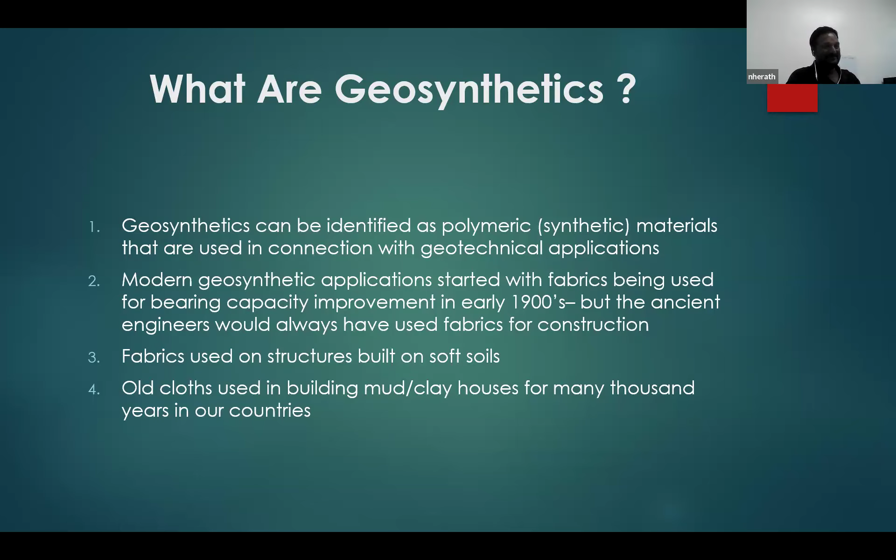Application of geosynthetics: we use it for retaining walls, very high retaining walls, without using metal and rock structures, or in conjunction with metal and rock structures. The ability to use lightweight but strong plastic reinforcing materials like geogrids and nets have been helping retaining walls and retaining structures for a long time.

Roadways - if you ever think about when you're traveling on a swampy area, predominantly soft soils, and wondering how this whole road you're traveling on is holding up without going down or deflecting - most of those cases, geosynthetics are involved in different modes.

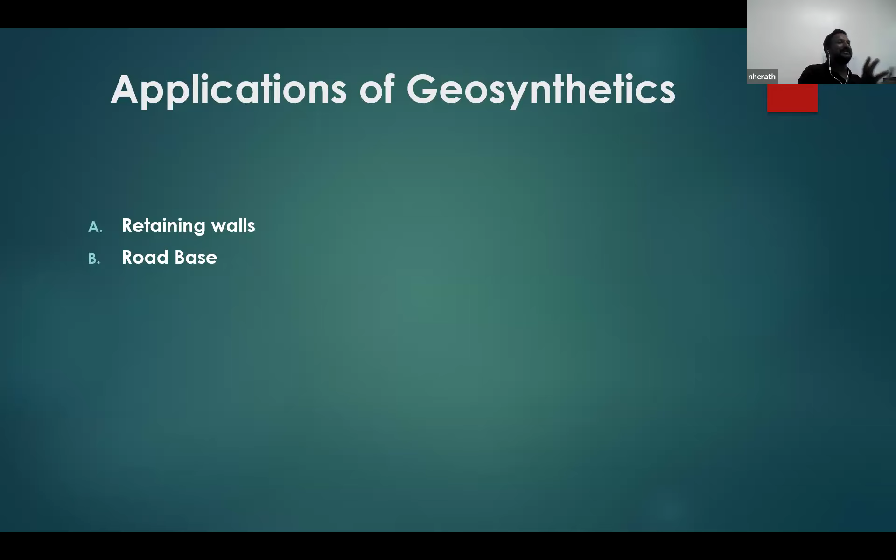Erosion control, which can involve drainage controls using different types of drainage nets and drainage applications. Predominantly, structures people used to use were perforated pipes wrapped with textiles or wrapped with a rock blanket, which is being replaced in most applications by very simple, ready-made geosynthetic strip drains and structures.

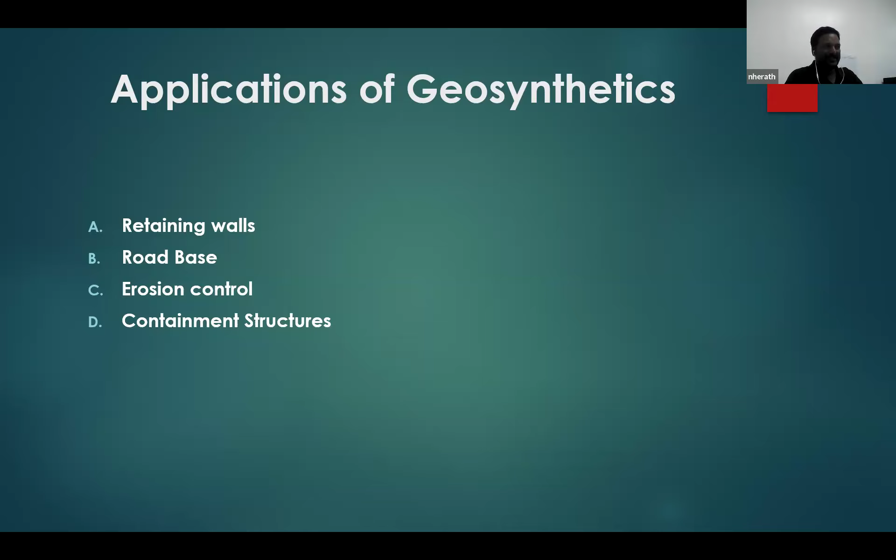This isn't today's topic, but I thought it's a good thing to share a few things about the other uses of geosynthetics. Containment structures - this is our topic today. Containment structures: landfills, tailings dams, chemical ponds, effluent ponds, leachate ponds, whatever it can even be - containment of drinking water, and drainage applications.

Leak detection applications - this is a new area where geosynthetics are coming up. I have added a couple of slides at the end to describe some high-end leak detection techniques, some being used as part of quality assurance, with conductive polymers and conductive geosynthetics increasingly used in structures. So when a leak happens, you will know where it occurs without going into investigation with electronic systems. But I think leak detection is a separate subject by itself, a topic for another day.

PFAS - poly and perfluoroalkyl substances - is increasingly becoming a hot topic. That's been found in a lot of firefighting chemicals and non-stick coatings. Now people understand that PFAS can create long-term and short-term health impacts. So modern day geosynthetics have a big emphasis on this. There's a lot of research and development, especially in Melbourne, on developing new geosynthetics that can trap, filter, and manage PFAS. As engineers you must be aware of the increasing awareness about PFAS. It has always been there, but only now we've started talking about it, understanding what it can do, how to test it, and how to contain it.

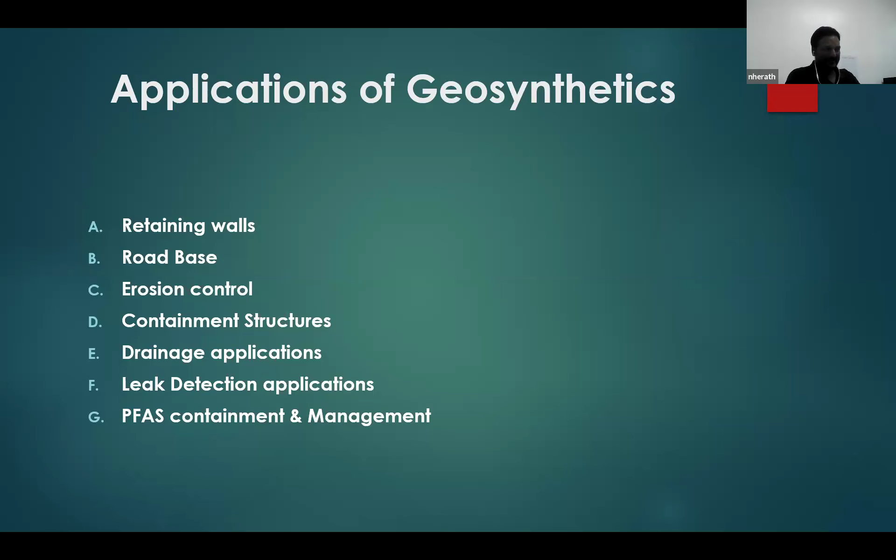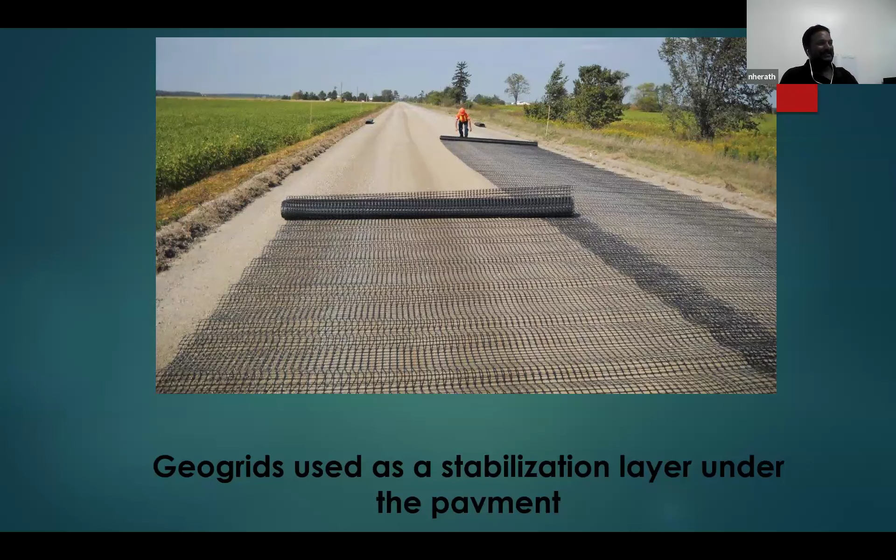A typical example: geotextile used under the pavement as a separation layer. On the left-hand side you can see a road constructed without the separation geosynthetic layer - this is ideally a heavy grade geotextile. You can see the lower subgrade clay material and the rocky material from the top invading and getting into the soft material, causing deflection upon traveling. On the right-hand side, the geotextile stops this from happening.

In this case, the geotextile is acting as a separation layer, stopping the aggregate on the top layer from pushing into the lower clay material, thereby maintaining the shape of the formation. In the long run, what you get is a proper road that will last years and years without needing repair.

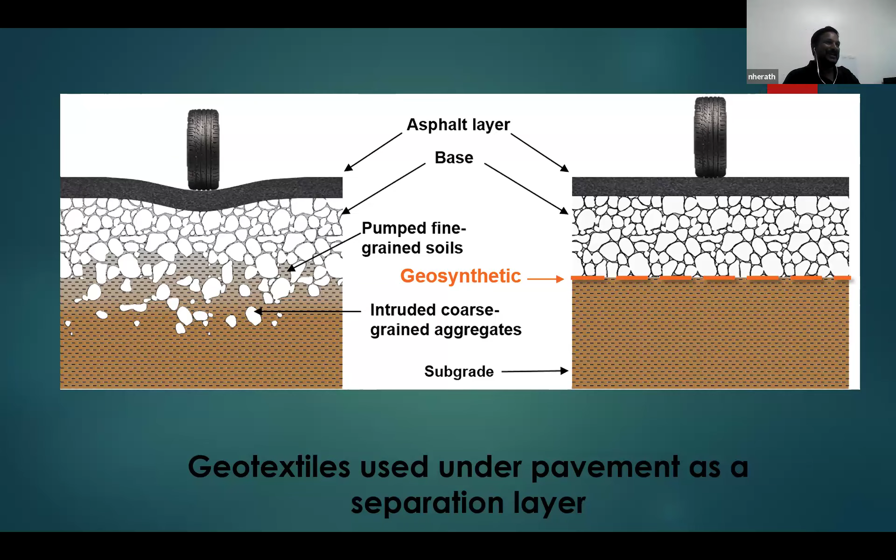Landfill and containment structures - this is the main topic we are going to talk about today. Landfill and containment structures, and the main task of a landfill.

Just to be clear, the landfills I'm talking about are the rubbish tips where we put the municipal waste. It can be clinical waste, chemical waste, or some other waste. It's a purpose-built facility where you can store the waste in a way that the effluent generated is not going into the groundwater.

When it comes to landfills, the main threat is not the waste itself. In the good old days, you'd dig a hole and put waste into it, and that was no problem. The problem starts when it starts raining. Rain creates leachate by washing off all the decomposed or chemically contaminated material, creating that liquor we call leachate. If that leachate goes into the ground, it creates contamination in the groundwater.

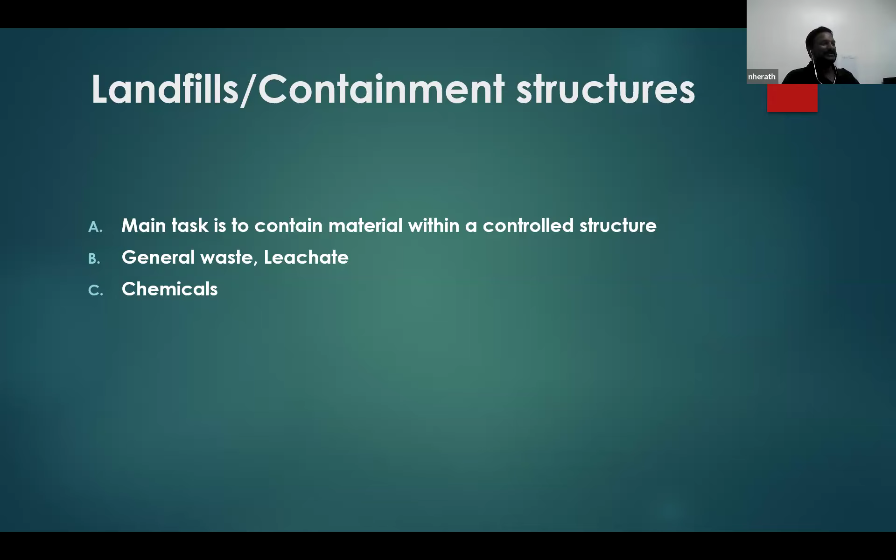And things like that, where you get all these nasty chemicals. Then you have specific chemical storages - here in a lot of places in Australia, you have specific purpose-built big storage tanks where they store things like sodium hydroxide, caustic soda, heavily corrosive material that you don't want anywhere near your groundwater. So there are specific geosynthetic applications, geosynthetic layers and materials being used in these containment systems.

Clinical and contaminated waste, drinking water, irrigation water - especially, I'm familiar with a lot of areas in Australia where you get rain only a few times a year, or maybe once a year, and then nothing after that. So a lot of people build big irrigation dams and try to protect all the water that they can. So drinking water or water storage facilities are also being lined with geosynthetics.

Mining waste - we do a lot of work with mines. A typical mine, one example, is a gold mine: you go down, you excavate, you bring the rock. Gold is predominantly trapped between the quartz veins, so you crush the rock and then leach it with sodium cyanide to take the gold out. But as a result, you get sodium cyanide and cyanides going into the water.

So if you are running a gold mine, you are not allowed to put your mine waste anywhere - you have to build specific huge, almost landfill-like facilities to put your process waste, solid and liquid. Also, when you go deep digging and mining, one problem is that you have water underneath, so dewatering mines is a big subject in mining. You always have to pull your water out, but what comes with the deep lying groundwater is chemicals like arsenic and cyanides and other things.

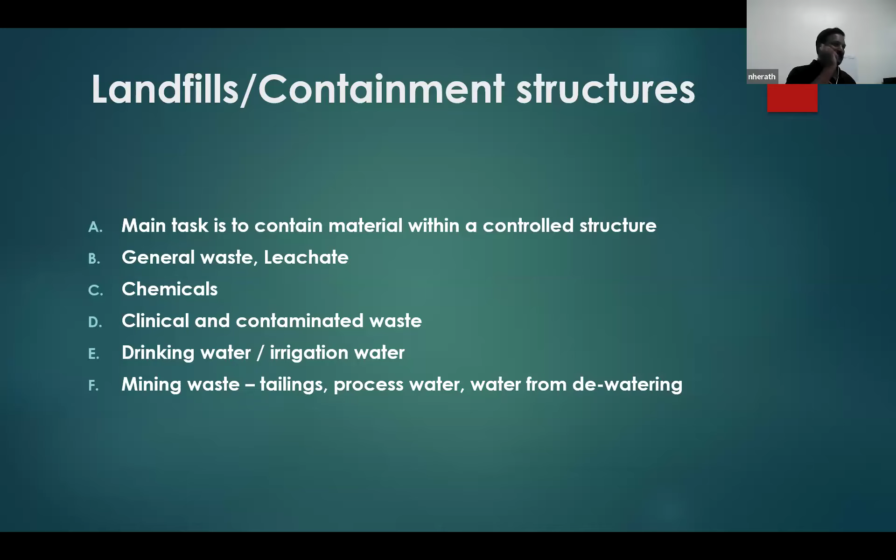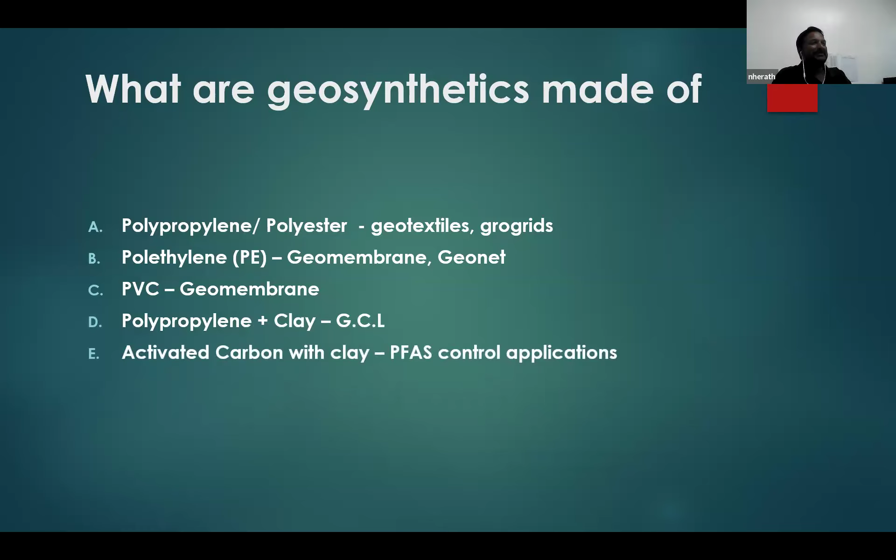GCL, made with polypropylene or polyester geotextiles with a mixture of clay - geosynthetic clay liner. Then you have activated carbon with clay, increasingly being used. All these we can talk longer about, but I think this is not the time - activated carbon is being used in GCLs for PFAS related control applications. Then you have clay with polymeric additives to enhance swelling ability of the GCLs.

Structure of a typical landfill - typical structure of the engineered landfill. You can see landfill has the baseliner, waste being placed, you have a leachate sump. The sump collects the leachate, and you have pipes connected to that to collect it, and you have waste placed. Another significant thing about the landfill, especially the municipal waste landfill, is that you have decomposable materials - upon decomposition it generates landfill gas, mainly methane.

This methane is a problem - it has explosive qualities. So there's a big emphasis at the end of the life cycle of the landfill to cap it. Capping is a different process where you make sure no water is going into that one, generating leachate. At the same time, you have applications to trap the gas and take it out. If your landfill is big enough, there are a lot of landfills in Australia where they use that gas to generate electricity. I know there's one city council, probably many times smaller than Colombo, whose landfill gas after about 4 landfill cells is generating enough power to run their council and municipality buildings. So that's something that's going to waste being used with the proper applications.

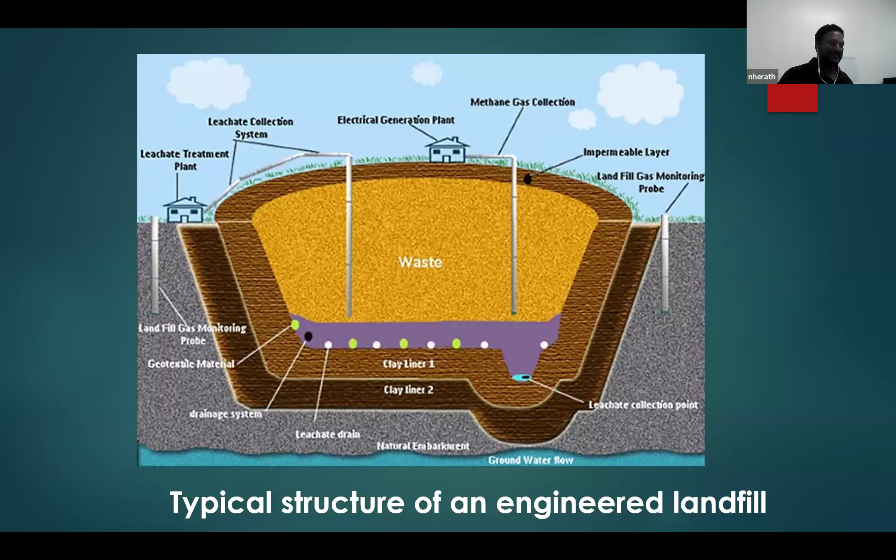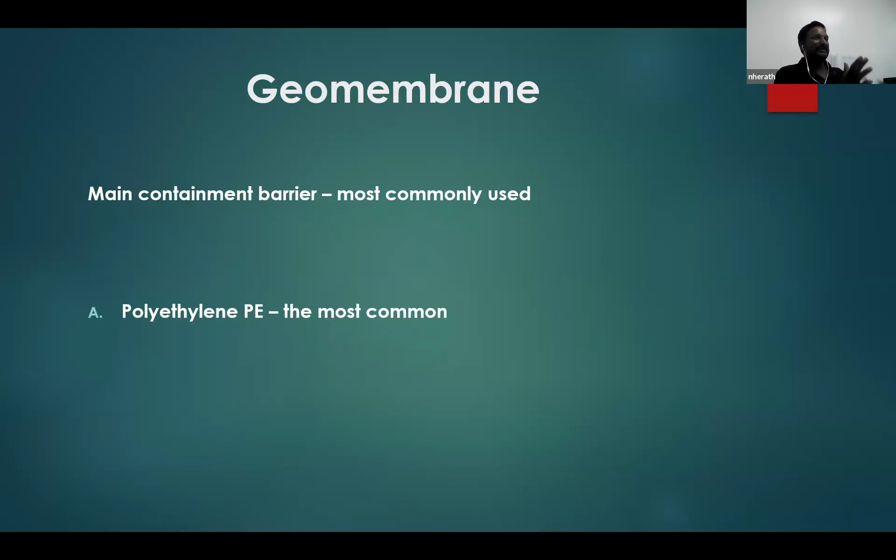Geomembrane - polyethylene is the most common material. Main containment barrier, most commonly used, is the geomembrane. Impermeable and has a long service life based on the make and the additives. So that's another topic again.

When you are using corrosive or highly oxidative materials, the polyethylene resin - obviously the raw material comes from the petroleum industry, most of the time coming from the Middle East - is mixed with a lot of material like carbon for strength, and then a lot of antioxidative materials are used so it will withstand the corrosive or oxidative nature of the material you are going to store in the landfill. Additives is a different subject, but depending on how the geomembrane is made, it can have a medium to very long service life.

PVC is another material. Bituminous geomembrane is an increasingly popular application in containment structures, but not so much in landfills - this is mainly for mining waste tailings dams. Bituminous geomembrane is a heavy grade geotextile, like if you're dipping it in tar - you're putting it in a solution of bitumen, so it becomes an enhanced, thicker material. It's increasingly becoming popular especially in hot parts where the polyethylene geomembranes get wrinkled when you're placing it.

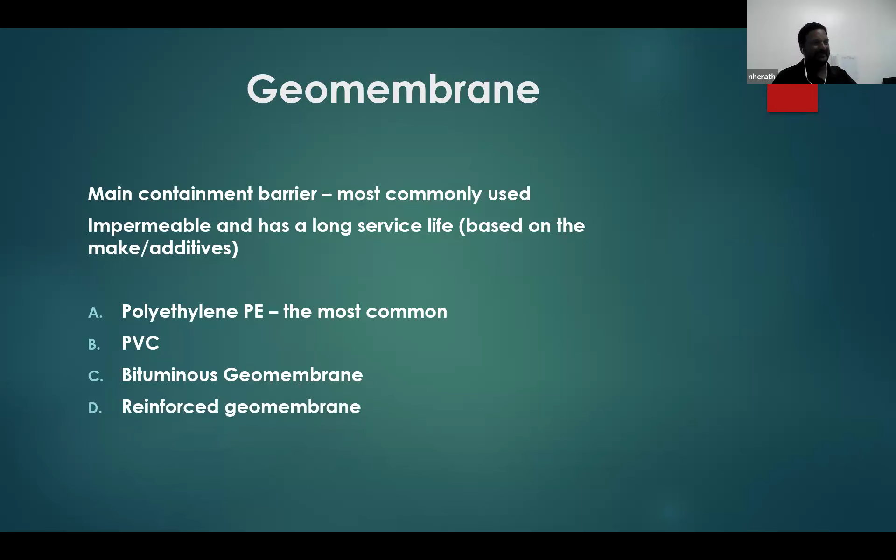Then you have reinforced geomembranes with the polyester grid inside. Typically, geomembranes come like this - these are rolls, about 7 to 8 meters wide, can be about 150 meters long. This is how you deploy them for someone who hasn't seen them - the machine holds the geomembrane, and these people use metal clamps onto it, pushing it down and placing one after another.

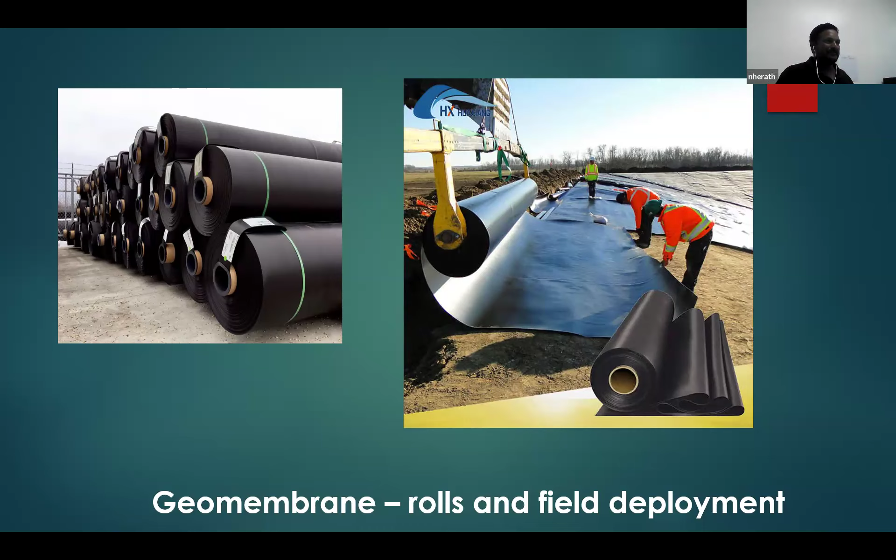You overlap it with about 150 millimeters, and then you weld it with a heat welder, like a laminating machine. This is called a dual wedge welder, and these welding techniques are becoming very sophisticated.

This particular welding machine has the hot wheels pushing the top and bottom layers together. At the same time, it applies heat and pressure. So this is called fusion welding.

That pressure and heat makes the two polymer sheets, two geomembrane sheets, melt and fuse together. So it's called fusion welding. And once it's done, it becomes stronger than the parent material.

So this is called a dual wedge welder, and these welders can be programmed with the speed and temperature and everything. On a very hot day, you run it at low temperature and fast speed, and on a very cold day, you run it slow but at high temperature.

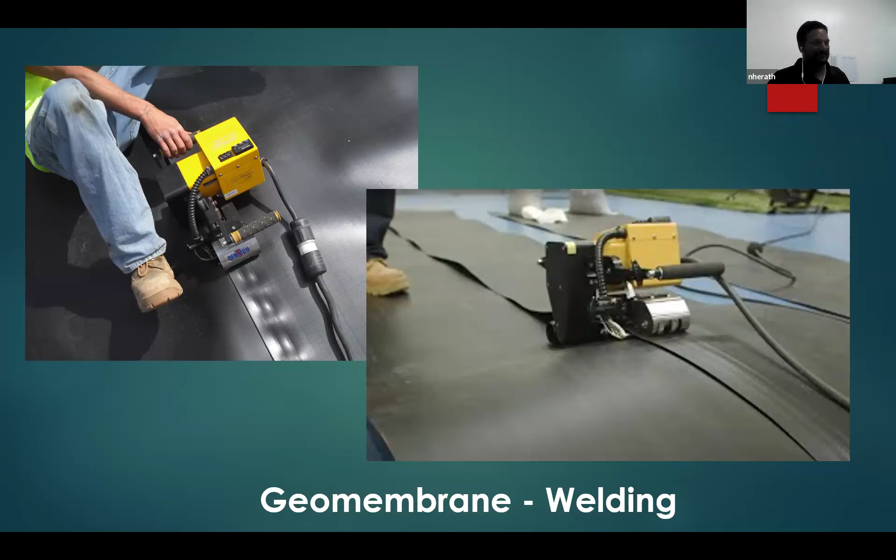Geosynthetic clay liners, GCLs: high quality bentonite clay sandwiched between two geotextile layers makes a GCL, which is a geosynthetic clay liner. This is something that's developed after geomembranes. So what you do is you have bentonite.

If you are familiar with bentonite, it's a naturally occurring clay with very high swelling ability, with a liquid limit that can go about 200 to 300%. Imagine the normal liquid limit of a normal clay, where it turns into mud, is maybe 20% or 30%. If you have high fine clay, a lot of slimes, sometimes it can have a bit higher liquid limit, whereas bentonite can have maybe 10 times that, like 300%.

So 3 times its own weight of water can be absorbed and swell. The main way it works is once liquid or water gets into it, it swells and creates an impermeable barrier. It's easy to install, and it's more impermeable than a clay liner.

Most commonly used is sodium bentonite for its high swelling capacity. If you use a very fine clay and compact it, you normally get a permeability around 1 times 10 to the minus 9 meters per second. You normally install about a 1 meter thick clay liner in a landfill, whereas you can get the same impact using a 1 centimeter thick geosynthetic clay liner rolled material.

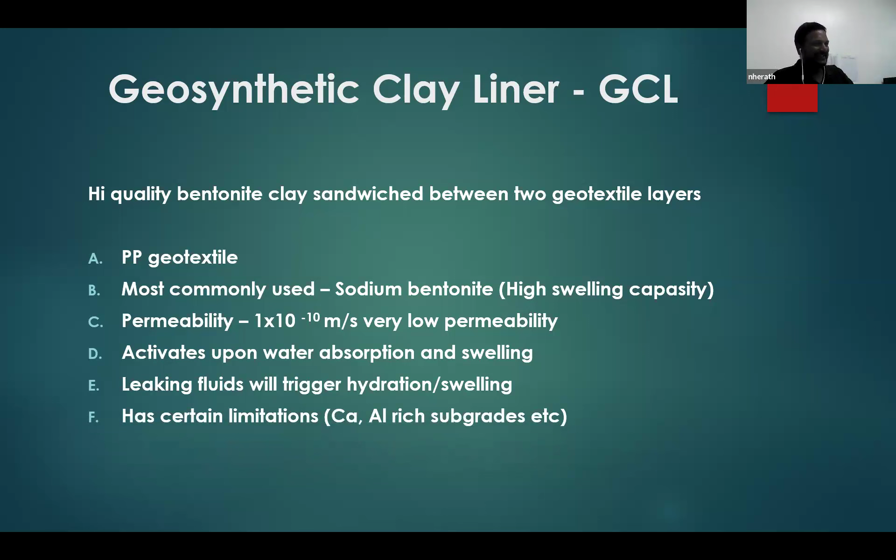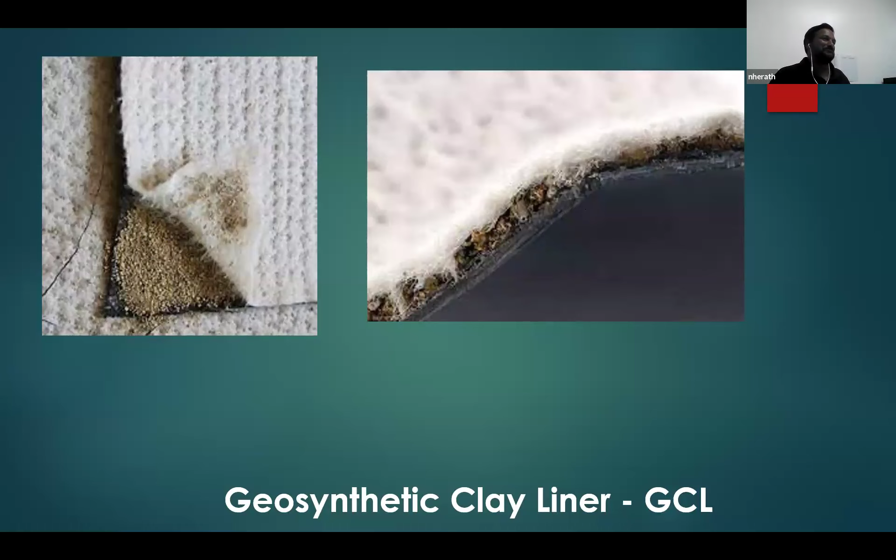This is in the dry form, only about 1 centimeter thick. You can install it very easily, but it gives the impact of a 0.5 meter thick clay liner upon installation. It's costly, but I think the convenience of installation makes up for that.

So here's an example of how much it can swell. A small amount can swell up to a big volume.

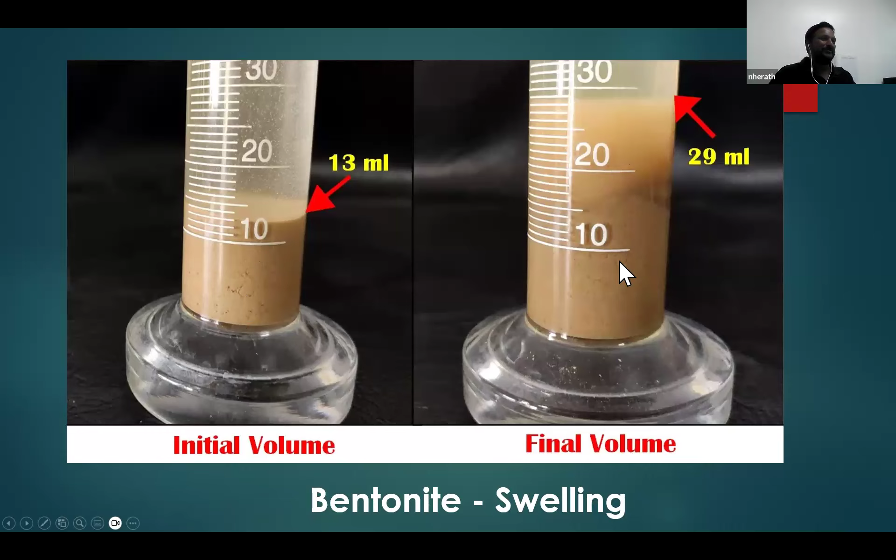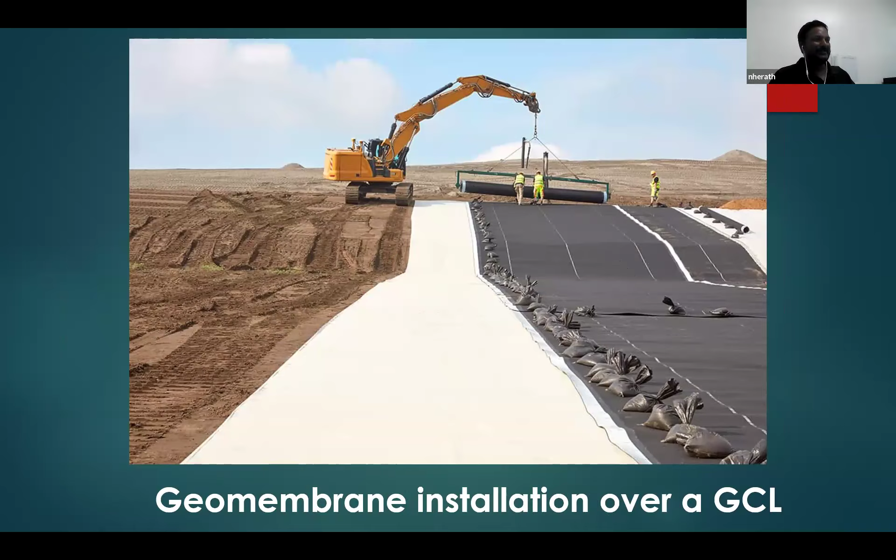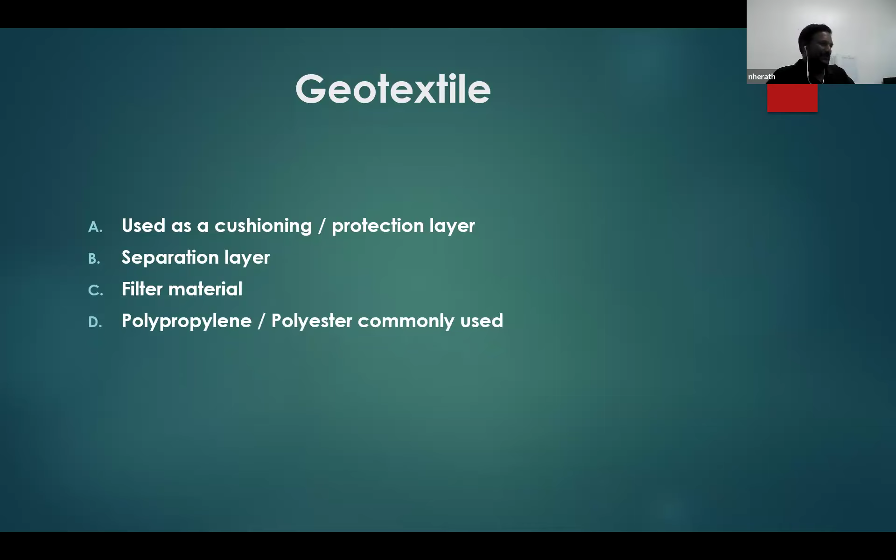Geotextiles are used as a cushioning or protection layer in containment structures, or for separation or drainage structures in roads. They act as a filter material made predominantly out of polypropylene or polyester, the most commonly used, though other materials exist too. Thicker materials are for puncture strength over the geomembrane; heavy grade ones are something like 500, 600, 700 grams per square meter for cushioning, whereas thinner grade textiles are for filtration applications.

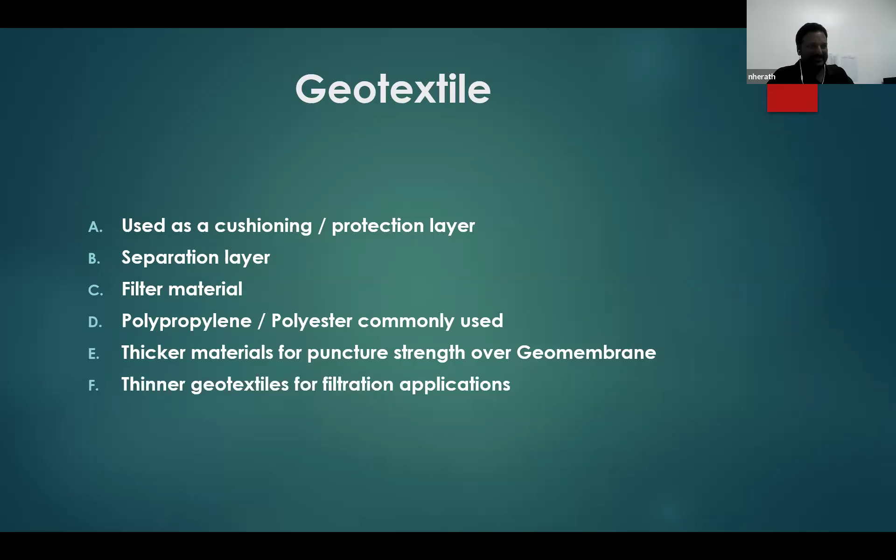Quality management. You've got to have quality. These materials are expensive, specifically made for the purpose, but you need a good quality management system so you can make sure you're buying the right thing, the people installing it are adequately qualified and do the right thing, and nothing happens in between like physical damages.

Darshini, can I have another 5 to 6 minutes? Yeah, sure, Nilantha, no problem. Okay, I realized that, okay.

So for quality management, each project has a technical specification guideline that tells you how to install every layer, how to install the materials, and the standards you have to follow. Material selection criteria are indicated - how do you select the right geotextile, right geomembrane, the right GCL for the intended purpose that meets the design intent.

Internationally recognized standards and guidelines are in use, so it's easy to say your geomembrane has to satisfy this standard. These standards exist everywhere, so you can use them easily - it's universally accepted. All you need is people who know the guidelines, a construction quality assurance system, and a plan.

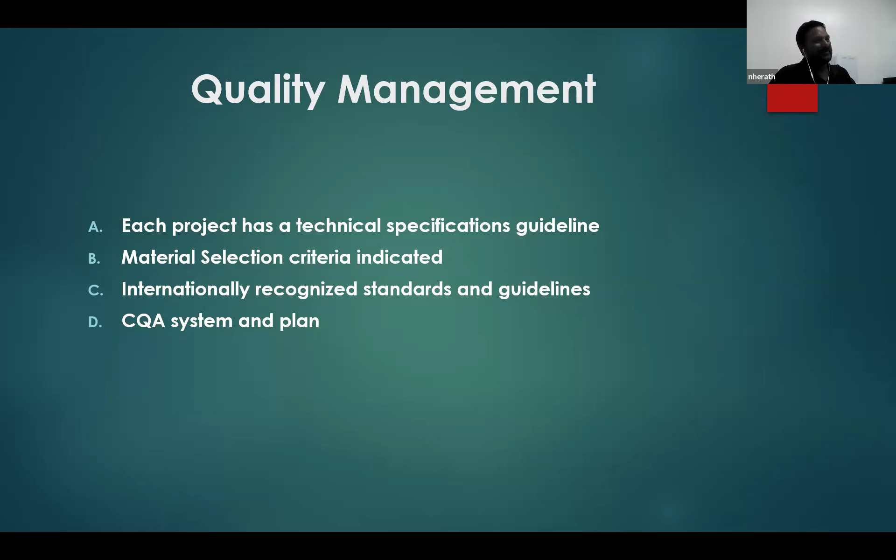Every structure, every containment structure - no matter how good your materials are, how experienced your people, or how good the design is, an independent quality assurance system with people looking at all the aspects is paramount. They do a good service that combines all the little things together to give the right results at the end.

When it comes to quality assurance, the Geosynthetic Institute - GSI, GRI - you can browse them on Google. They've been making manufacturing methods, testing methods, installation methods over a very long time. GRI makes guidelines - two examples: GRI GM13 is about the ideal quality of geomembranes. These are available free - I put a link that gives all the GRI documents, telling you what to normally expect from a geomembrane, a GCL, a geotextile, and different types of materials.

Then you use internationally recognized test methods - ASTM, like SLS we use, predominantly we use ASTM here, American standards, British standards, EN, ISO - and they're all interlinked. Depending on where your material originated, you're tested and QA'd under that standard, but it's easy to match. If you do a test in Australia, you can match it to the same material under a parallel standard and interpret it in local terms.

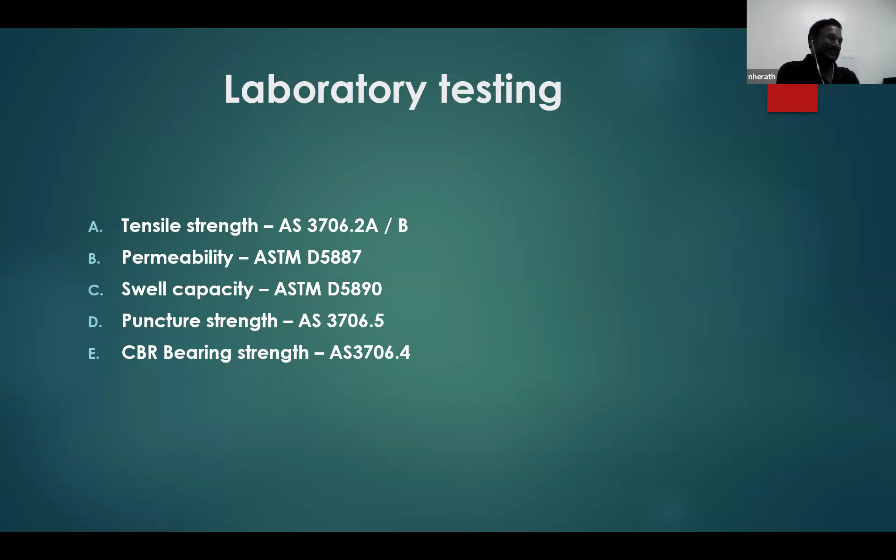You check that method and can test any material from anywhere, then interpret it in local terms. CBR, or bearing capacity - California Bearing Ratio - is used for assessing the bearing capacity of soils, and the same principle is adopted to measure the bearing strength of a geotextile, under standard 3706.4. These are just a few examples, but these keywords will help you find a lot more information.

Liner integrity assessments - this isn't new, it's been happening for a long time, but it's becoming mandatory now. If you install plastic membranes made with top quality material, installed by top quality installers, anyhow when 20 or 30 people are working on site, people walk on the membranes. Sometimes, a common thing here, a kangaroo jumps onto the membrane, and its sharp claws can damage it.

So when that happens, before any containment structures begin, this is the last part of the quality assurance system. Before you hand it over to the user, you've got to do leak detection. These leak detections are mainly electrical, but you also have water-based methods.

The water balance method involves filling the structure with water, observing it for some time, and seeing how much water you lose and trying to find how it's being lost. Colored dyes may also be used, injecting from one point and seeing whether it comes out on another side.

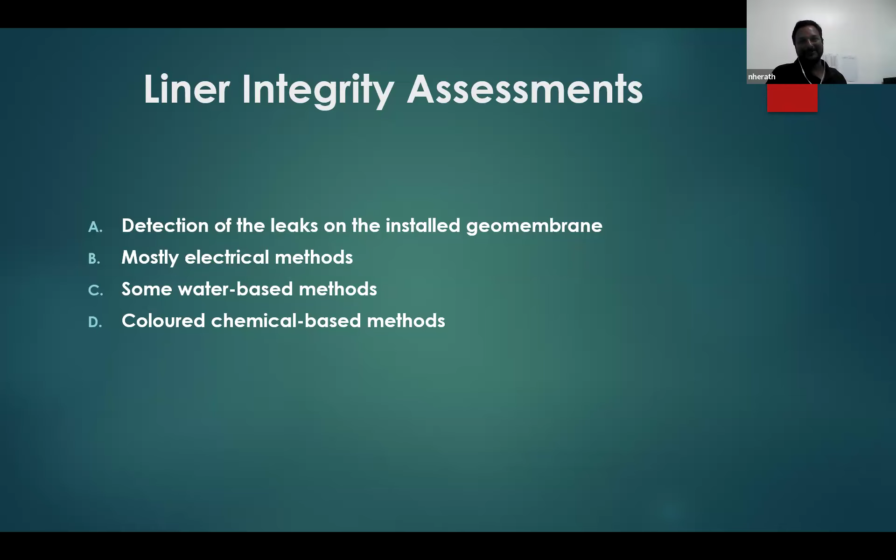But these are time-consuming methods. I'll try to put a few examples. This is the dipole survey method, a geoelectrical survey method where a person carries equipment, walking on a rock-filled area. Underneath the rock fill is the geomembrane, the plastic membrane of the landfill.

So this is the rock filter that collects the leachate. You've got to have the filter, but when installing the rock blanket with dozers and big machines, it tends to tamper the geomembrane, so you can't see where the holes are.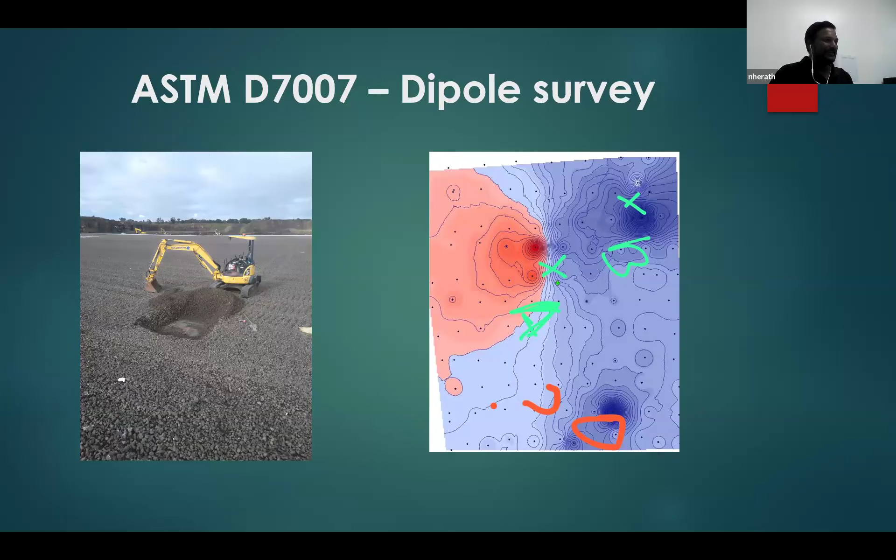On the left-hand side, you can see it's been found, and he's digging the hole to find it. You can pinpoint 1 or 2 millimeter size small holes if you have the right conductivity. This is another method.

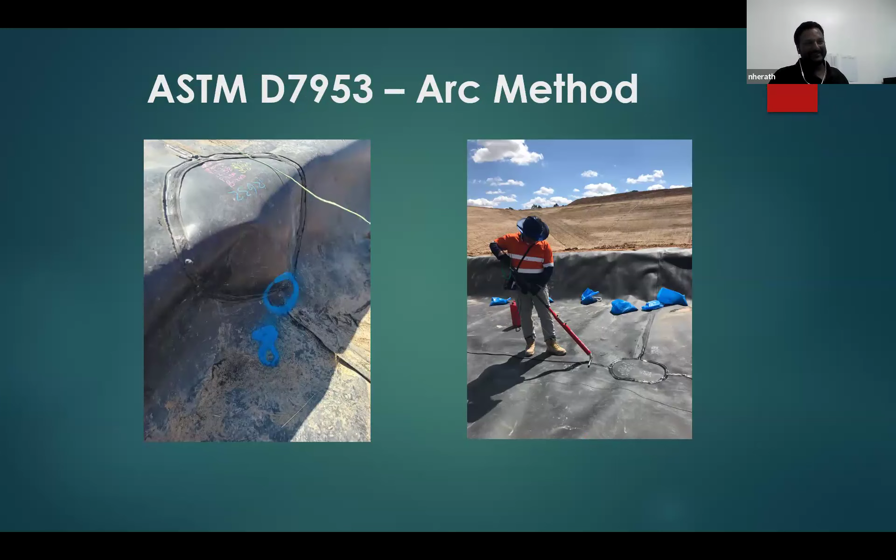It's called the ARC method. If you browse these methods, plenty of information is available online. It's an electrical spark method using about 20 or 30,000 volts to find tiny defects, tiny pinholes in the membrane.

So the CQA person, the technical CQA technician or engineer, should be a suitably qualified, trained person who comes and assesses the construction process.

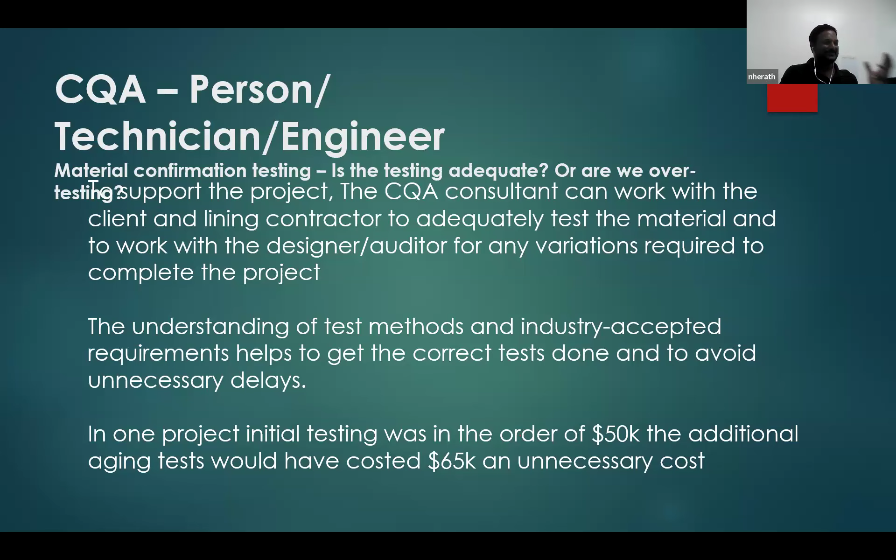How can a CQA person, or construction quality assurance, make it easy for everyone? It means the construction quality assurance person, by knowing the techniques, the specifications, and the design intent, can help every party conducting the work to work together.

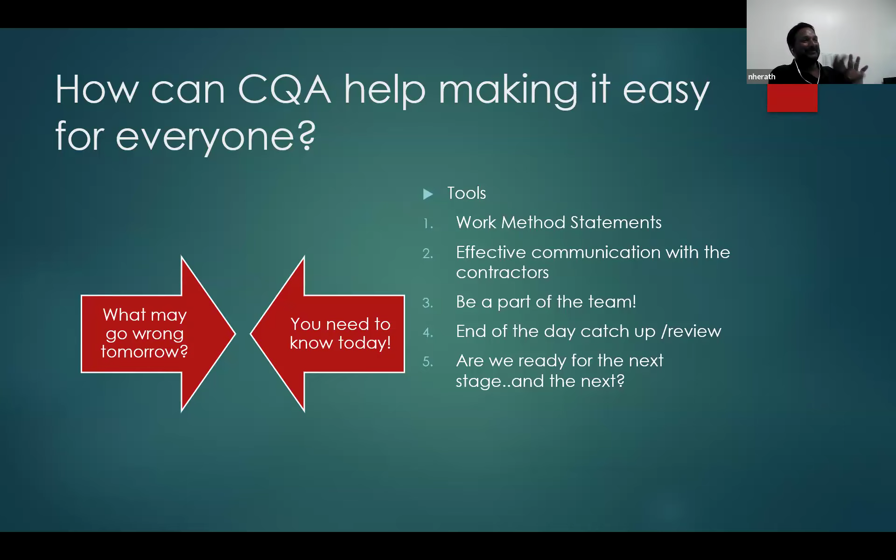We call it the name of the game of construction quality assurance: you've got to anticipate what can go wrong today, so tomorrow you won't have a lot of unhappy people. You can intervene. A proper QA engineer, QA company, or QA consultant should be able to guide the others on how to work on the next section of the structure.

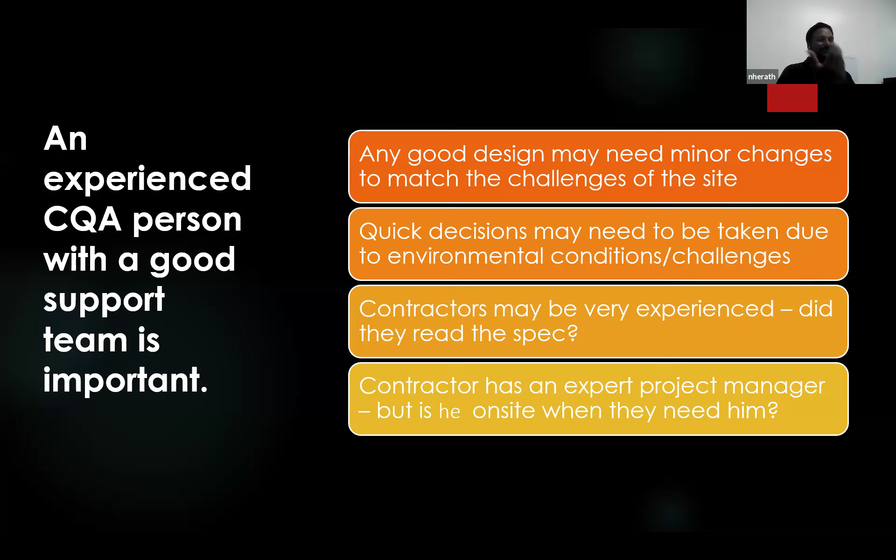A slide about experience—why you need an experienced CQA person. In Melbourne, it has to be independent from the designer, the principal, or the construction company, but it happens in different ways.

Effective, good communication with the interested parties—independent CQA is important. Adequately experienced people can make the project's quality much better. Experience in the field is important. Construction quality assurance can help everybody achieve the goals, and finally meet the design intent.

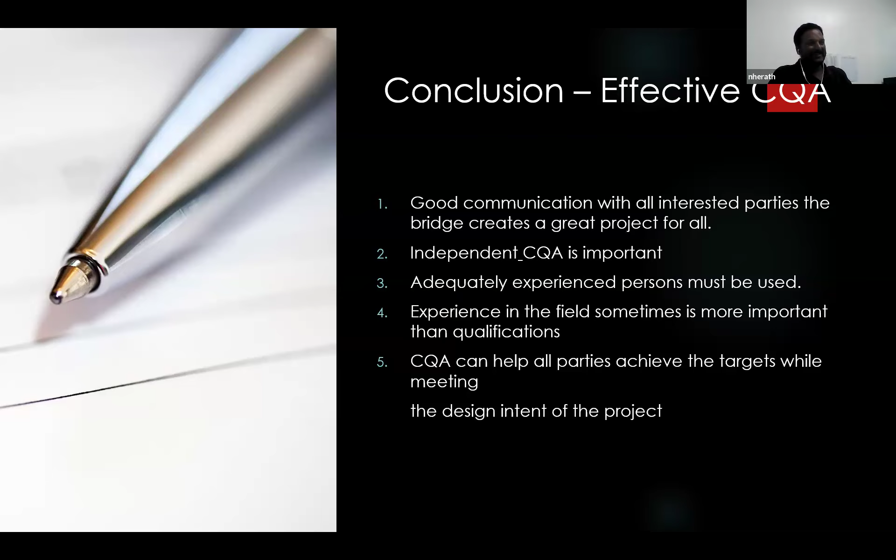So I tried to rush through—I don't know whether I rushed too much, but I had 36 slides, so I was trying to push this one on. I apologize if anything was unclear, but I'm happy to share a lot of other information in future if you need. Thank you very much for giving me the chance to do this.

So I think it's time to have some questions and answers.

Gabions are normally used for embankment strength applications. When it comes to strength applications, woven geotextiles are always preferred. Non-woven geotextiles can go up to about - if I talk about tensile strength - something like 900 grams per square meter, non-woven geotextile can reach about 100 kilonewtons per linear meter. I'm just giving comparison values, whereas similar woven material can have up to about 200 or 300 kilonewtons per linear meter. So woven geotextiles are stronger.

You don't use a lot of woven geotextiles in containment structures, but when it comes to gabions, any embankment reinstating and slope stability applications, you use a lot of woven geotextiles. But that's not the only thing.

There are a lot of other applications, like sidewall drainage. Say you have a slope, you're placing soil on it, and eventually if water penetrates and the placed soil layer tends to slip on top of the existing layer, mainly because the water sinks down to the bottom of the placed clay or material.

This creates a saturated section between the interface of the two materials. So something called geocomposites, which is a plastic net covered with thin grade geotextiles from both sides, is placed on this interface. Whatever water reaches it filters through the textile, goes into the net, and flows in-plane to wherever the desired area is. That protects the interface from getting saturated. So there are some other applications.

There are a lot of geosynthetic applications apart from geotextiles and grids, because one controls the strength, and some of the others control the water flow. So when it comes to that, you have to look at both aspects. Hydration and water is one thing, strength and pressure is another thing.